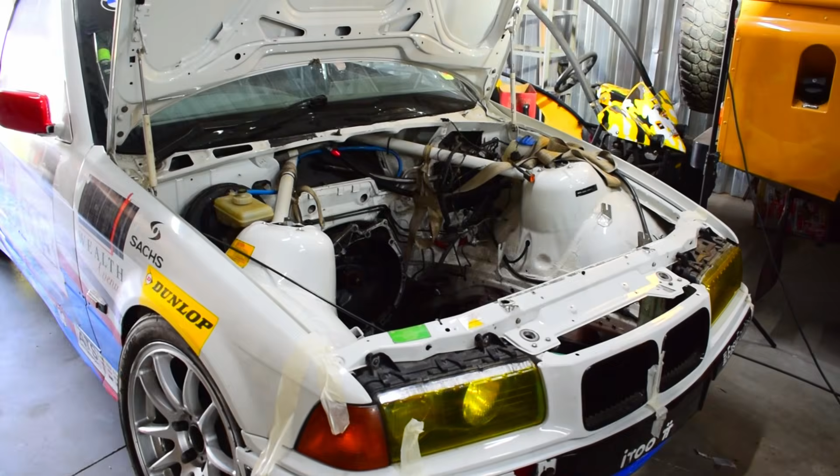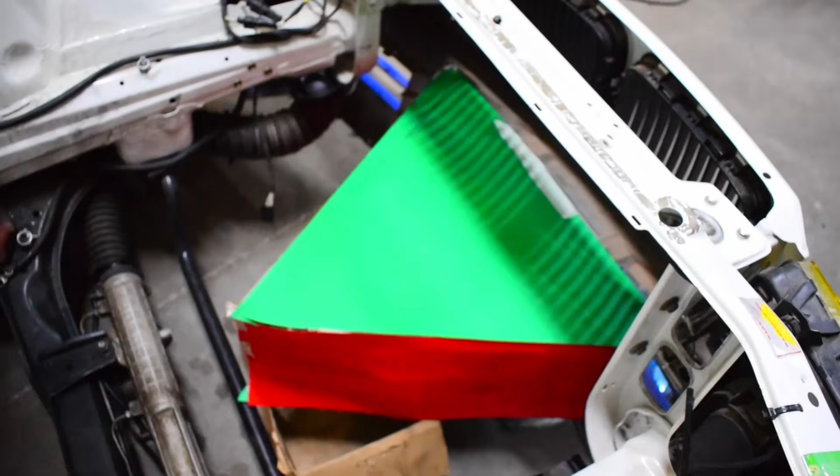Alright, so as you can see, there is nothing happening on the car, but we have a bottle holding the bumper up, and we have this very strange contraption in the front here. So why have I built this little box that looks like a triangle in a kid's playpen? It is so that I can get the dimensions of that area and kind of mock up what we need to do with the radiator.

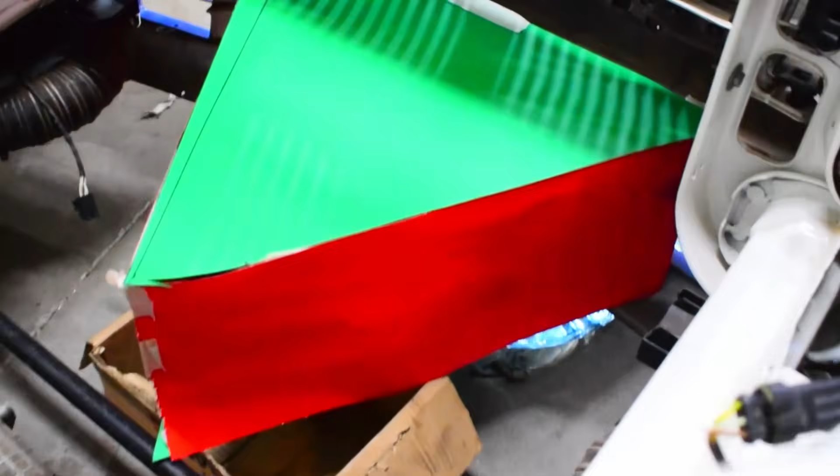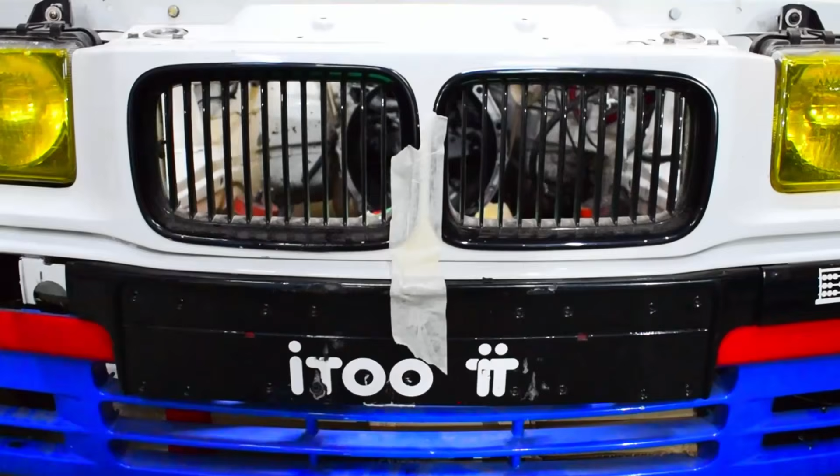So what you see here is that mock-up, and it is pretty much how our radiator setup is going to sit. It's very, very different to the conventional setup. We have our brace out, but ultimately these red pieces, one on either side, are going to be where our radiators are. The green triangle on top, with one also on the bottom, is going to be a boxing of the radiators. So in one of the previous episodes I mentioned that this kidney, when you're in the car, the left hand kidney is going to be feeding the intake for the throttle bodies.

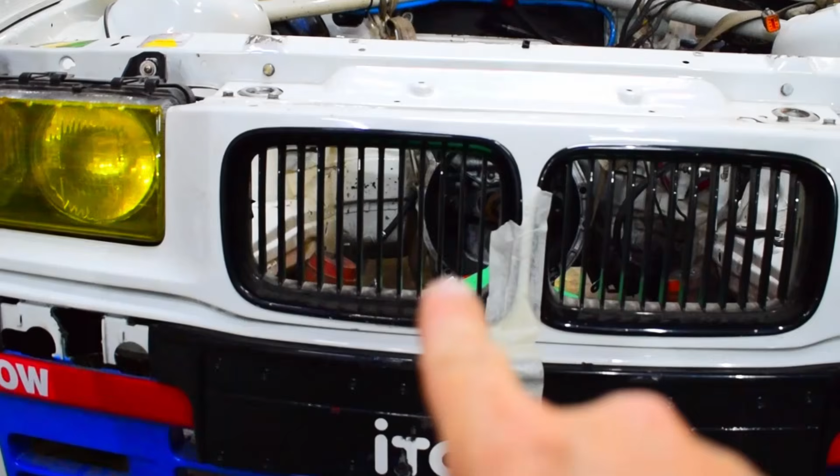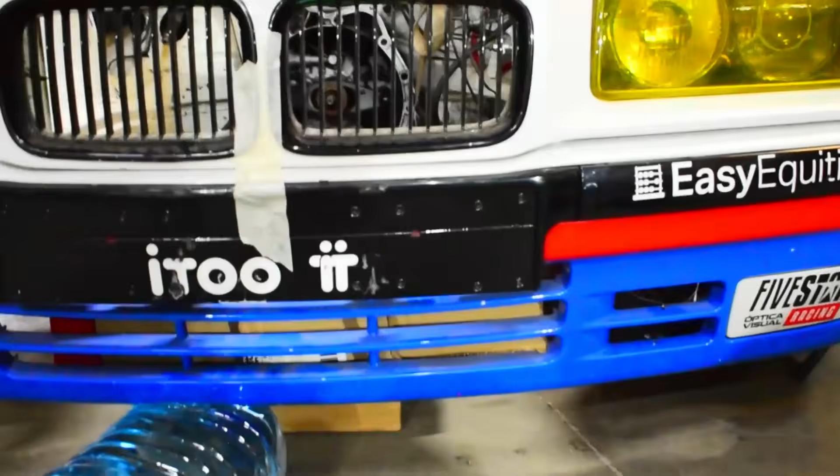That one is going to feed the oil cooler, and this bottom grill is pretty much going to feed the radiator, and that's why I've boxed it the way I have. These grills are going to feed the brake ducts. We're going to 3D print ducts for those on the back so that the brake line can go to the brake caliper.

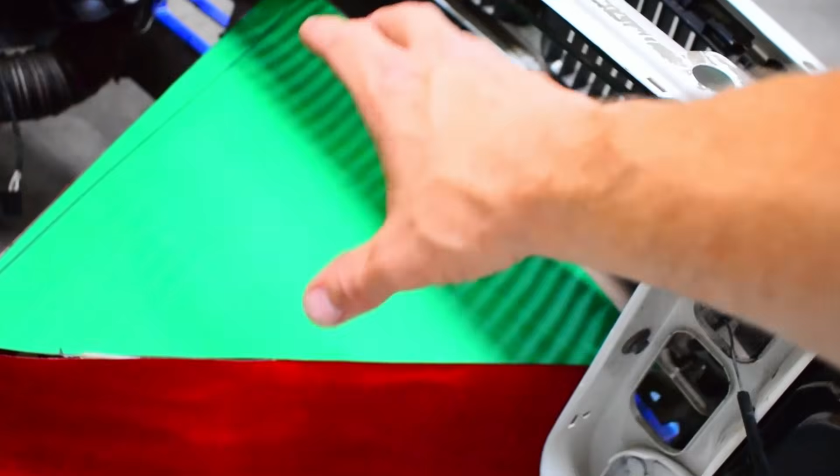As you see, this whole box section, that's how it's going to be in the car. So we're going to do it with aluminium, and we're going to have to box it off as you see it here. But ultimately what it'll do is create a high pressure area there and blow the air through the radiators and cool the area.

Now ideally, yes, you'd want to blow it up through the bonnet and do all sorts of cool stuff with aero, but we're not doing that because we're going for the stock E36 super touring look, which I am in love with. So that's what we're doing. Now, I've done a bunch of research on this, and it's fine to dump the air into the engine bay because that's what the standard cars do anyways.

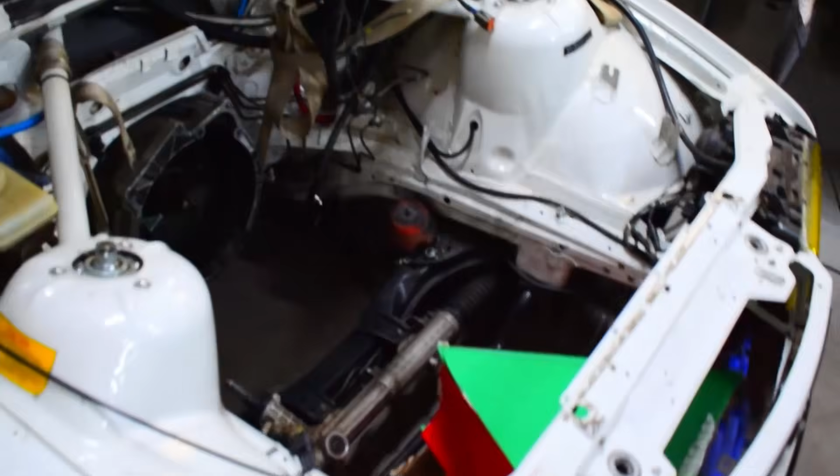Alright, so as you saw, based on that little triangle that I made out of cardboard, we need to start figuring out how that placement is going to go. So I don't have a radiator just yet that we're going to use, but I know which radiator we are going to use. I also know the dimensions of it and how we're going to make it work.

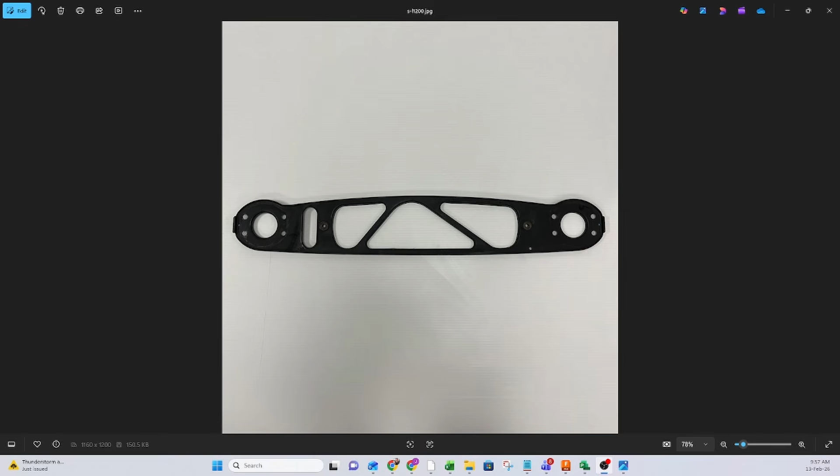In the meantime, what I've done is I've modeled up this thing. So what is this thing? In the standard car, we have a radiator brace, well, a chassis leg brace, that bolts onto the chassis legs on either side of the car.

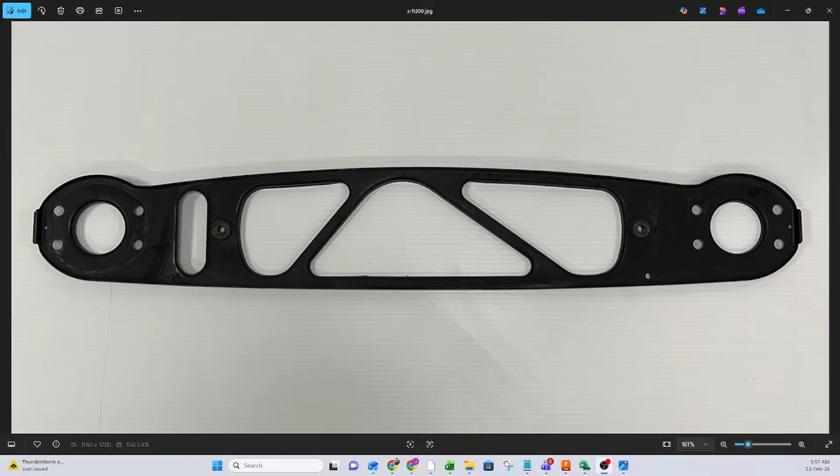And if you look at the front of the car, this goes on the one chassis leg side on the right, and this one goes on the chassis leg side on the left, if you're looking at the car, not if you're in the car. This is more of a support on the standard car, and then there are some things that bolt to it, etc. So this is made out of stamped steel, and it's actually quite heavy.

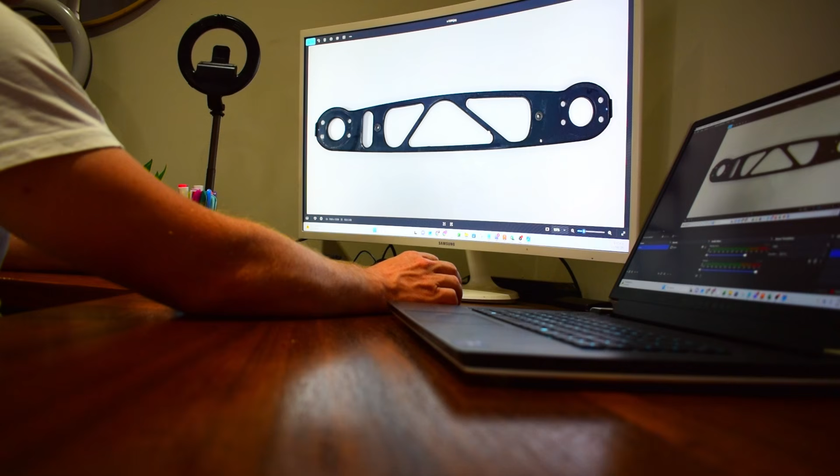So I'm doing away with this, but we still need some sort of brace, and that's why I have modeled this thing up. This will kind of go in the car, bolt to those same chassis leg positions.

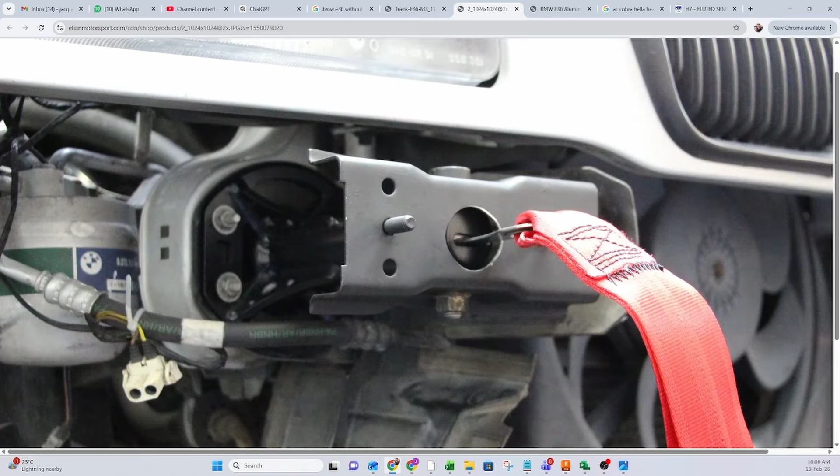Here is a closer picture of where the chassis leg is. This span on the original car kind of goes in front of it. That's where ultimately my design will pick up on these bolts on either side, and that's what you're looking at here. So if you're sitting in the car, this is what you're looking at. And then if I look at the front view, this is what it's going to look like. Why is this relevant? Well, we're getting rid of that steel stamped plate because of weight.

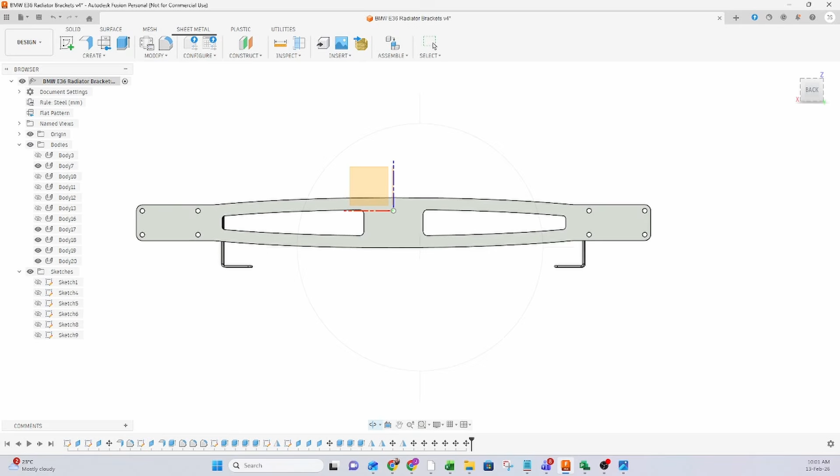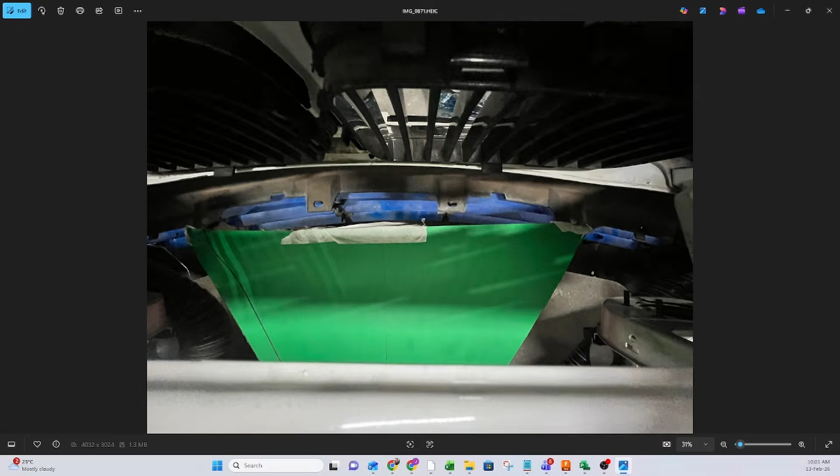But also because of access. And the reason for that is this is how our radiators are going to sit. Now if you remember, like I showed you earlier, we have this little triangle box that I made, that is kind of going to take the space of where the radiators are, and that's what I've modeled here. So if you're looking at the car from the front and the top, this is what you're going to see. Now the radiators have to be at a certain height so that they can fit within the center grille on the bumper, and that grille is going to feed ultimately the radiators, and that is this section here.

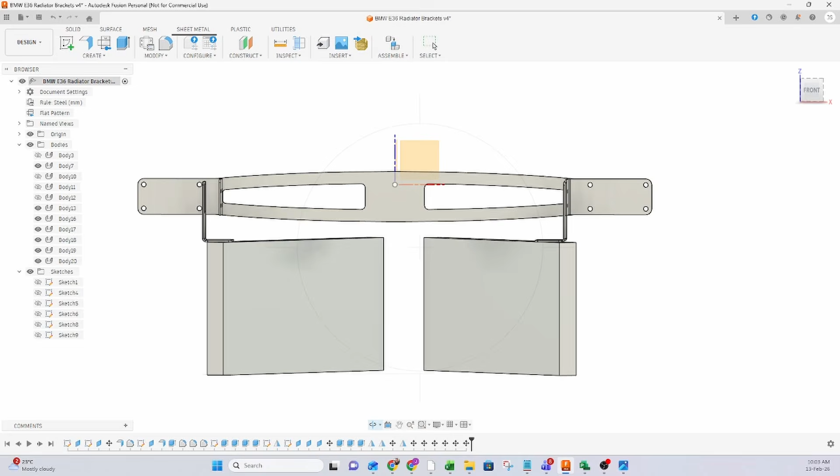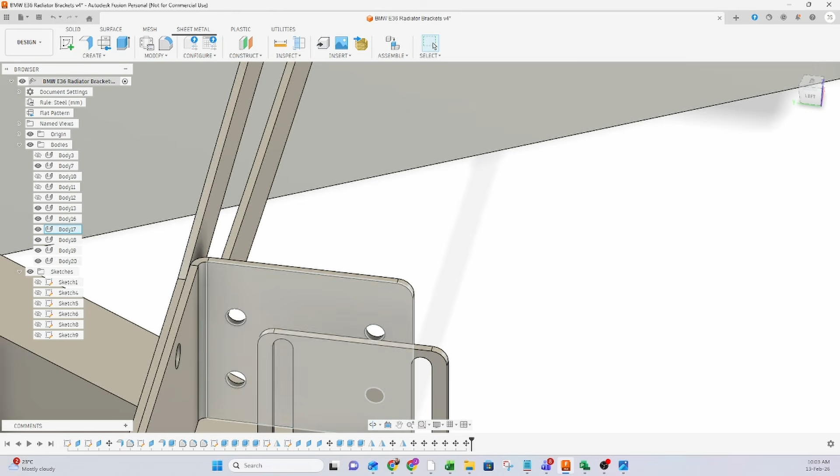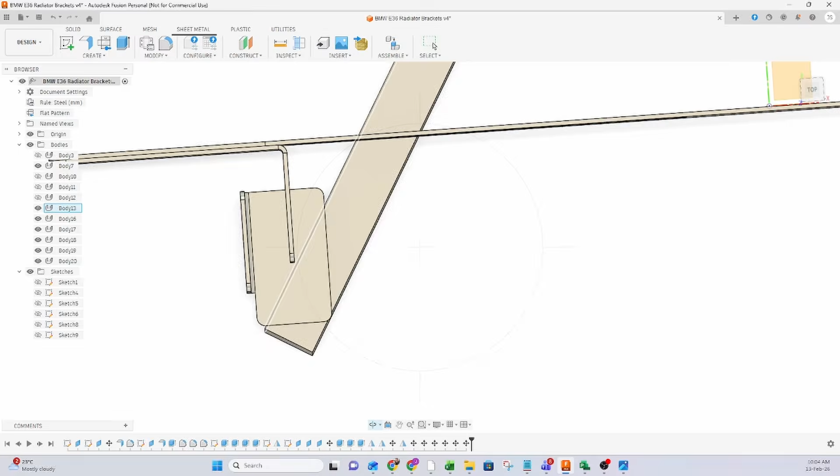Ultimately I'm trying to model that up, and the reason being is that we can then laser cut these aluminium plates so that they fit nicely. Now what I've done is I've made them adjustable, so you'll see these little slots here, and this bracket can move up and down. This bracket on either side, let's say the bracket that's highlighted now, I might have to make it adjustable from left to right, so that this bracket could potentially move backwards and forwards. And the reason for that is to be able to get the positioning of the bolt hole and the support on either side, because we're going to have to support the radiator in some way at the front.

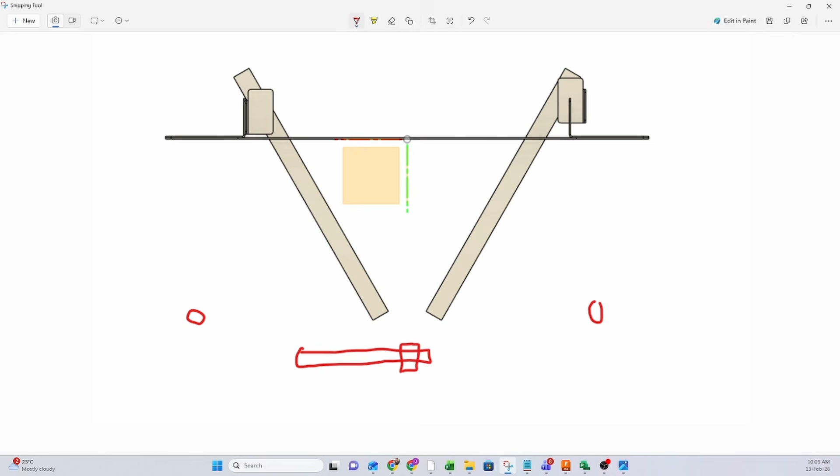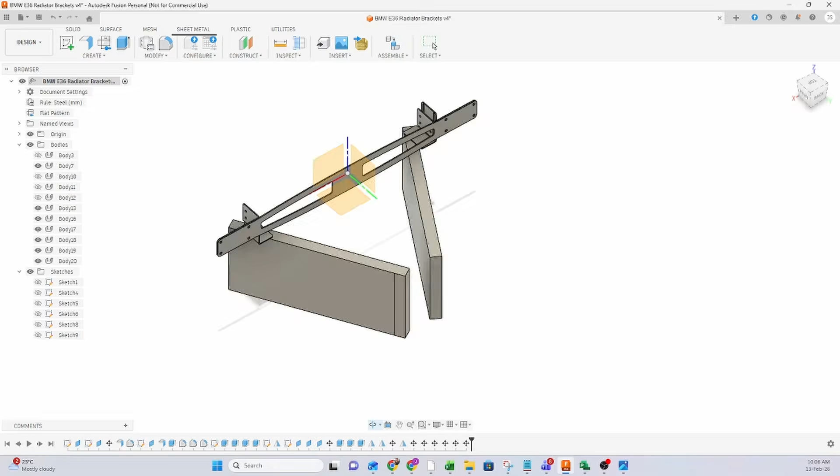Around this area is where the bolt for the front pulley is. That's the front of the dry sump pulley, and then the belt will go off in this direction. So obviously we need some clearance here, and then the anti-roll bar pickups, sway bars, are somewhere around here. So what I will then do is make a brace that'll kind of suspend between left and right of the anti-roll bar, let's call that sway bar, and then that will support either end on the front side. So then you'll have it supported on the front and then the rear by the crank pulley, and that solves that problem. But the reason I'm doing it like this is so that we can have a very nice finished product. So there's still a bit of work that I need to put into this.

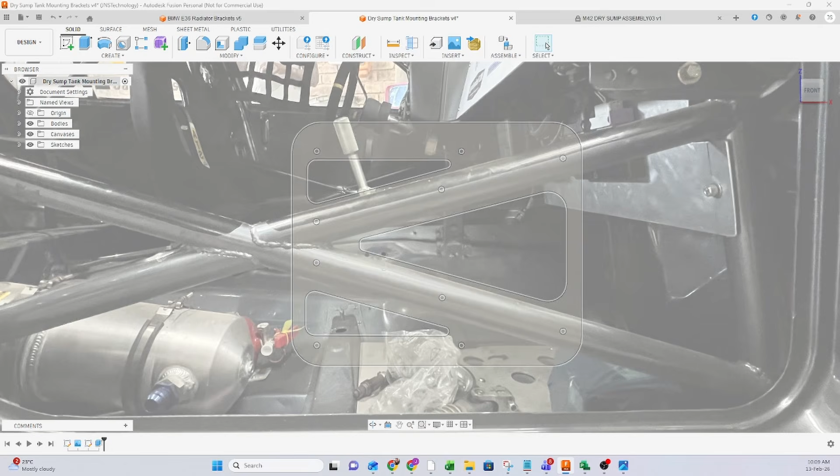So in the meantime, I have obviously taken this picture, but we need to get started on the rest of the brackets for the dry sump system. So I took a picture quite simply and then measured the diameter of the roll cage, drew up this little bracket, and you can see how it interfaces here, and there we go. So this is going to be the mounting bracket for the dry sump tank, and you can see the tank lying there, but ultimately it will mount to the roll cage like so, with these holes that I'm highlighting now.

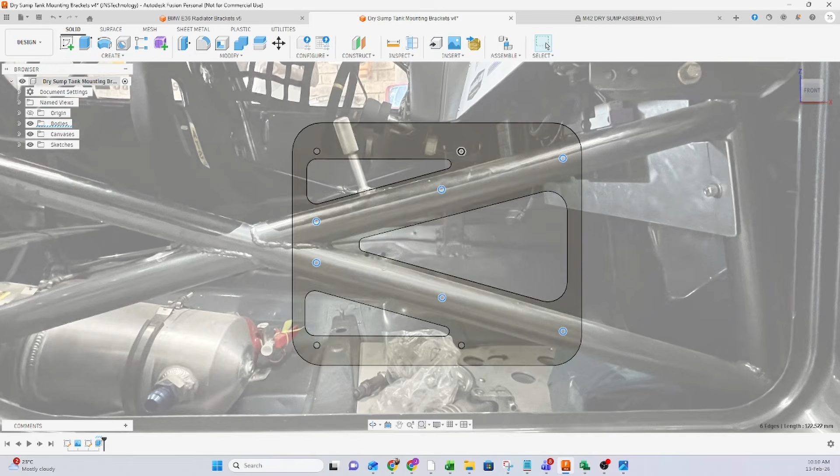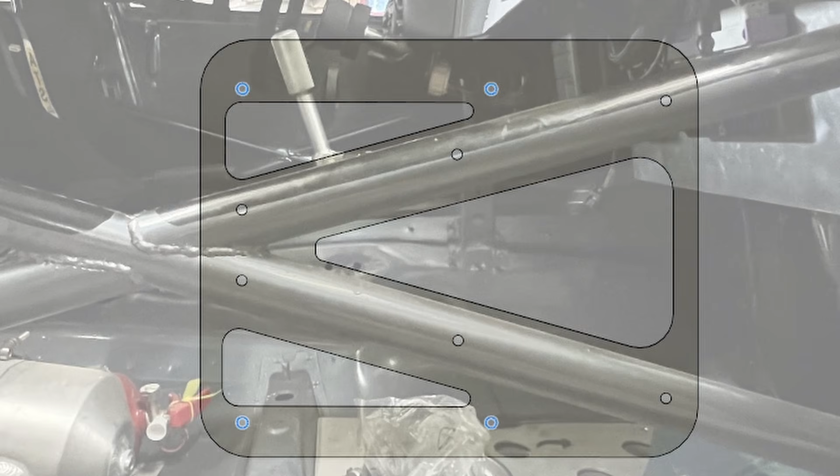So these holes highlighted in blue are going to be the mounting holes onto the cage, and we're going to use rivnuts, and that will sit on the inside. And then the 4 additional holes, 1, 2, 3, 4, will be the mounting holes for the tank. So this won't sit on the outside by the door, it will sit on the inside of the car, and then the tank that's lying on the bottom there will mount using its mounts to this. This I have sent for cutting, and this is going to be aluminium. What has also happened in the background is I have received the sump back after a few detailed design changes.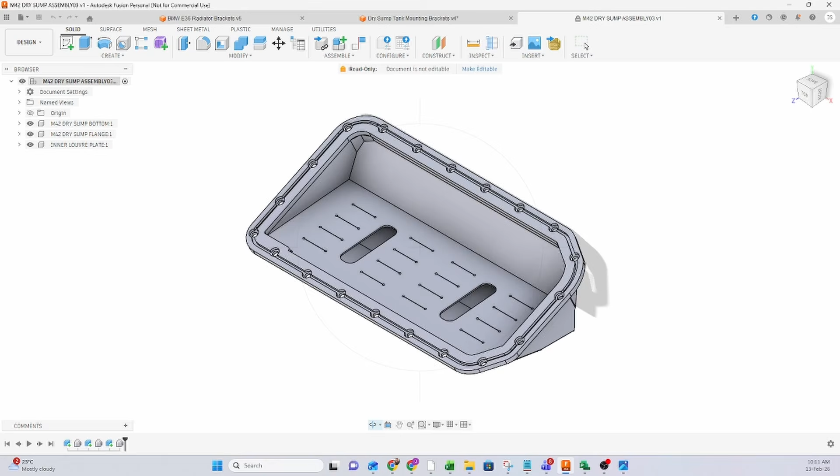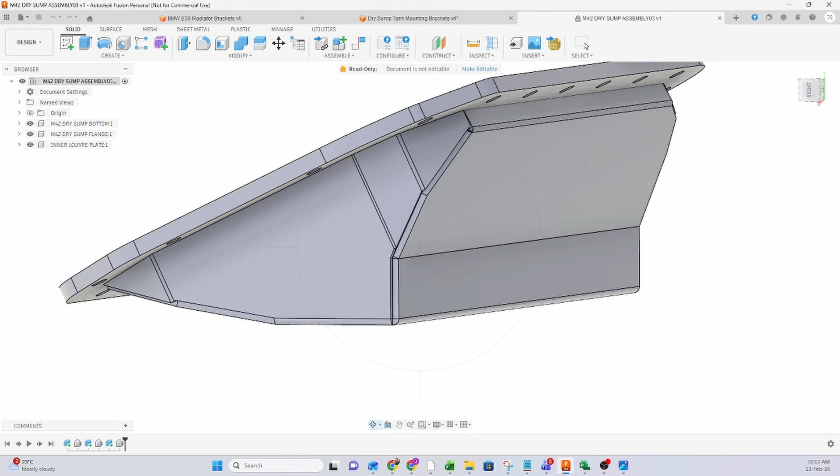So we are looking really good on this sump. We made quite a few changes, like I say, and I'm very happy with it. So let me just get the right view for you. So this is the front profile of the sump. If you look at it from the side, that's how it sits in the car. We haven't cut the holes for the sieves, we've left that to the fabricator. That is ultimately the design we've gone for. Now this will be the prototype, and this will be on my car. We will test it, but yeah, we've got to get through the basics of

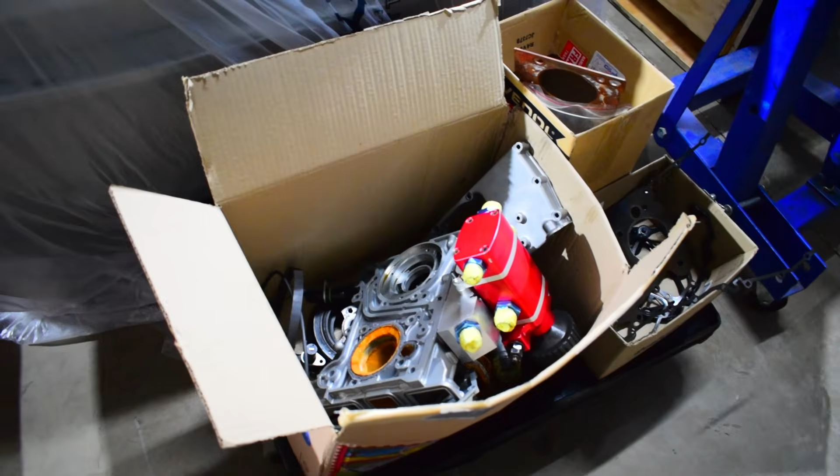making this thing work. My engine has bits over here, the block is over there, but the cylinder head I've taken away. I'm going to tell you in the next episode what happened there. I found a problem, and luckily we did, because it would have failed on us. So I'll take you through that problem. But that's going to be it for this episode. It's a bit of a weird episode, and it's short because I'm doing everything in the background, doing some designing, planning. I had to sort out that issue with the cylinder head, which is going to delay the whole thing by a bit. So in the meantime, I have to finish a lot of the other stuff that I'm busy with.